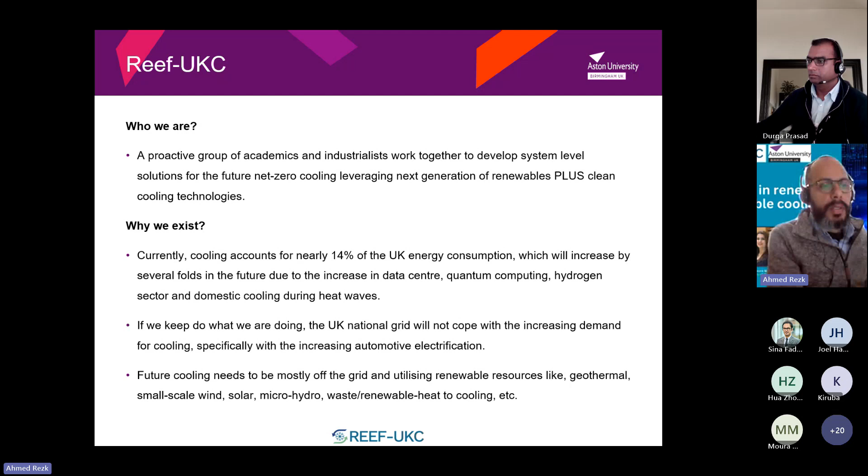So our approach is to get cooling off the grid, to make it more renewable powered cooling. That's why we need to develop new systems, and we need to power clean cooling technologies using renewable energy available in the UK.

What we do in the network: we do networking activities like webinars, in-person workshops, where you attend in person and participate in Reef-UKC. Our aim is to enable today's early career researchers to become the future leaders in this topic. So we don't provide solutions only now, but we need early career researchers to take the lead in the future to enhance this further.

We provide you with some training masterclasses specialized in clean cooling technology and renewable energy technology as well. All you need is to participate. There is no additional cost. We pay all the costs for transportation and all these sorts of things, so your participation is free of charge. We cover all these charges. We are funded by EPSRC to run these activities. So all we need from you is to engage in these activities, whether online or in person.

We promote multidisciplinary research and pave the way to more transdisciplinary research in the UK, and we act on 5 fronts. The first front is technology development. Because most of us are engineers, we want to develop new renewable powered cooling technologies, so we look at clean cooling technologies and how to integrate them with renewable resources. We consider the environmental impact of what we develop today for the future. We consider sustainable businesses and business models, and we try to fill any gaps with current policy to accept new solutions and options, and how to make the unusual usual for the future. We don't work in silos; we try to engage with other ongoing activities funded by EPSRC and other funders to fill the gaps. So we don't want to repeat other people's work—we complement what other people do.

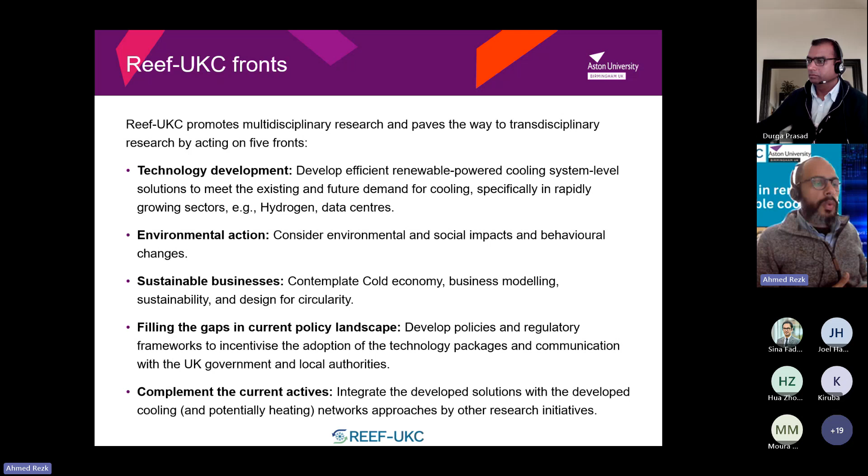We promote stakeholder engagement. We promote EDI in research - equality, diversity, and inclusion. We aim to generate impact.

That's why we try to engage more with industry. We need to take these new solutions to the industry, and we try to promote industry investment in research and development. We provide you with seed funding to enable specifically early career researchers to do the preliminary investigation for bigger projects.

We aim eventually to become a bigger SuperGen hub focused on renewable power cooling systems. So we started firstly with the core members group of 10 universities and some industries from cooling background, heat exchangers, and renewable energy.

We have partners also from City Council - Birmingham City Council and Belfast City Council - and we try to reach out to more local authorities. So this is where we started.

Now we have an increasing number of academic participation in the network, from industry and from international stakeholders and partners from other universities and other companies. And this is only after 3 quarters because we started in July 2024. As we go along, we expect this network to grow further and pave the way to the SuperGen hub in the future.

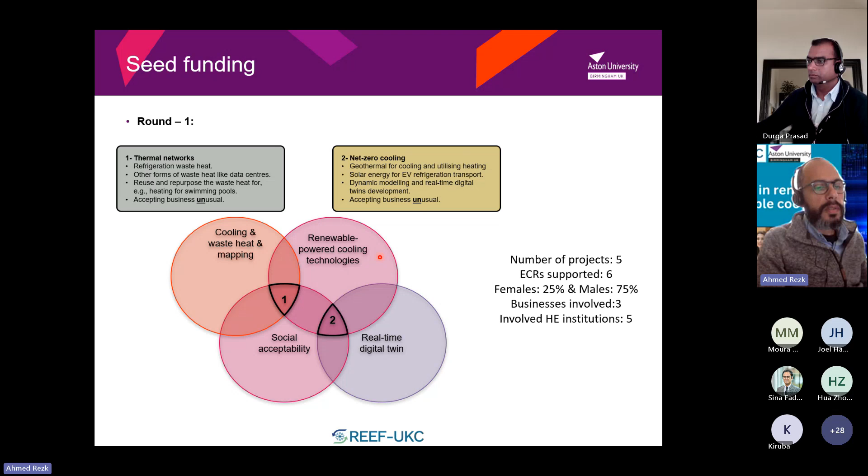So anyone attending today, or anyone you know, you can tell them they can apply for this next round of funding. To be successful for the next round, you need to propose a project based on the theme of our network, which is renewable power cooling technology.

Your project should be multidisciplinary. You should show us that you are planning for bigger funding, because we seed fund your idea - we don't fully fund it. So we help you get started with funding, specifically if you are an early career researcher.

You need to show us that you work very closely with early career researchers. We also promote early career researchers leading the project if possible. And we promote partnership with industry - any partnership, whether cash contribution or in-kind contribution, is very welcomed.

The most important thing is that your project engages with industry. They don't need to fund or put cash into your project, because sometimes we find a very smart SME - they need to grow, but they need partnership with a university to get further funding. So we encourage these activities.

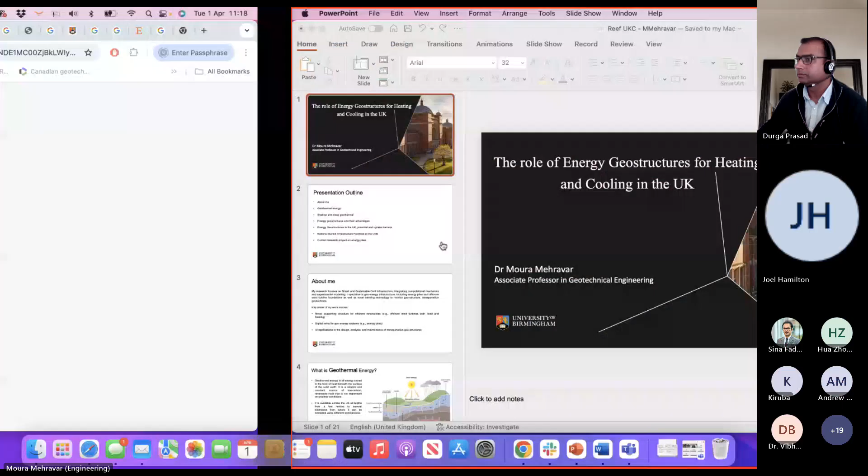Okay, thank you, thanks Durga. Hello everyone, good morning, and thanks for inviting me to participate in this webinar. Durga, I don't know if I can share my screen now. Yes, please try and I'll confirm. All right then, okay. Can you see my screen? Something happening. Yes, it's there now. Thank you, that's good then. Can you hear me clearly? Yes Moura, it's fine.

Okay then, so as Durga mentioned, my presentation is about the role of energy geostructures for heating and cooling in the UK. I'm an associate professor in geotechnical engineering at the University of Birmingham. I was introduced earlier, but just mentioning again.

My presentation outline: firstly it will be about myself briefly, my research expertise, and then I will talk about geothermal energy in general, give you a brief introduction of what it is about, in case your background is not very relevant to the geothermal or geoenergy sector. I will move on further and talk about the difference between shallow and deep geothermal. Then we will go through energy geostructures and also their advantages as a renewable energy will be discussed. I will talk about energy geostructures in the UK, their potential for the UK for both heating and cooling, and the barriers for their uptake will be discussed.

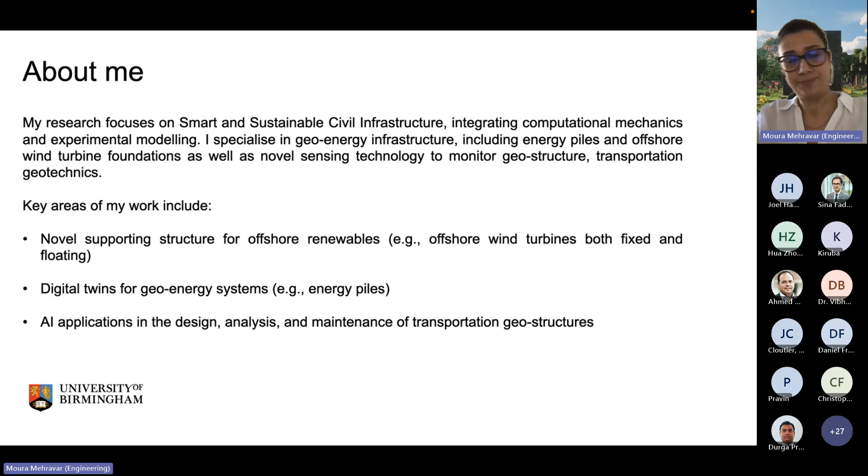So key areas were already touched, but emphasizing on digital twins for geoenergy systems, including energy piles, which is the current project that I'm leading, and AI application in the design, analysis, and maintenance of transportation geostructures, and in general for any types of geostructures. So those are my main research areas and expertise.

So let's, just minimizing. Can you see the figure clearly? Because I can see the slide, team details are shown on the right-hand side of my screen. I don't know if you have this on your screen as well. Yes, I can see it clearly. That's good then. Yeah, it's clear, good then.

Okay, what is geothermal energy? Geothermal energy is all energy stored in the form of heat below the ground in the ground subsurface. It is a very reliable source of energy and considered a low carbon, renewable energy, which doesn't depend on weather conditions, even in the UK.

It is available across the UK at different depths, from a few meters to several kilometers. So based on the depths, it can be extracted and stored using different technologies.

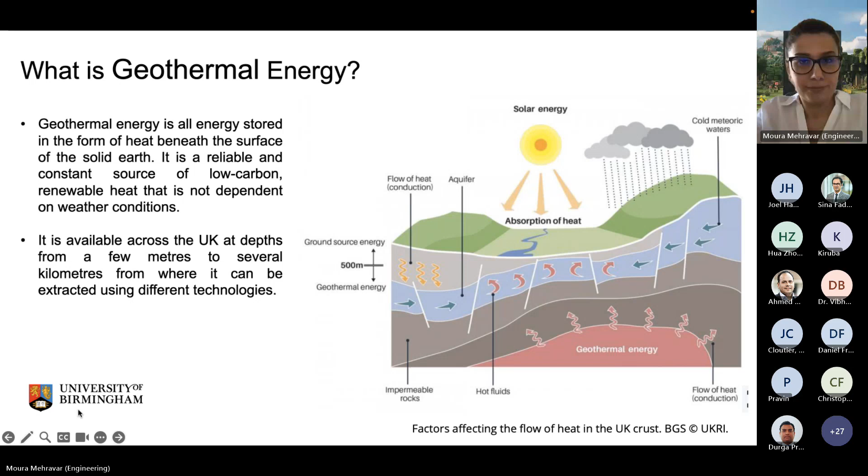There is a difference between shallow and deep geothermal. I'm going to very briefly touch on it, and my focus today will be basically on shallow geothermal - I'm not going to talk about deep geothermal.

Shallow geothermal energy is the low-grade heat, normally between 10 to 25 degrees centigrade, which is stored in the shallow subsurface. Normally we consider up to 500 meters below the ground as shallow geothermal. It requires the use of ground source heat pumps and can be used almost everywhere in the UK for both heating and cooling of buildings.

Deep geothermal energy is the heat stored at depths larger than 500 meters, and temperature within the ground increases with depth in line with the local geothermal gradient, which on average we consider 25 degrees centigrade per kilometer that we go down in the UK. So that's the difference between shallow and deep geothermal.

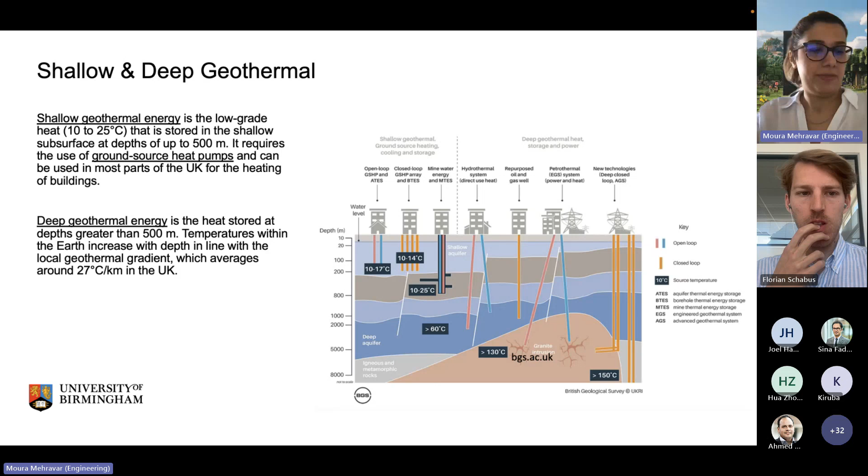Next, I'm going to move on and further talk about the main purpose of today's presentation, which is energy geostructures. Firstly, energy geostructures are part of ground source heat pumps, so during the presentation I may talk about ground source heat pumps and geostructures both together. It's important to know that this is a part of ground source heat pumps.

There is a slight difference, but it is categorized as a part of it. Energy geostructures are a type of shallow energy technology where building foundations, such as piles or other buried infrastructure like underground stations, metro stations, tunnels, sewer pipes, and underground walls, as you can see in the pictures, are used to access heat from the ground.

It can be used for both heating and cooling purposes, as well as acting as a structural element of a building. So they are novel dual-use engineering substructures, which means they can be used for heat transfer and storage, as well as the original purpose of their design, which is structural function.

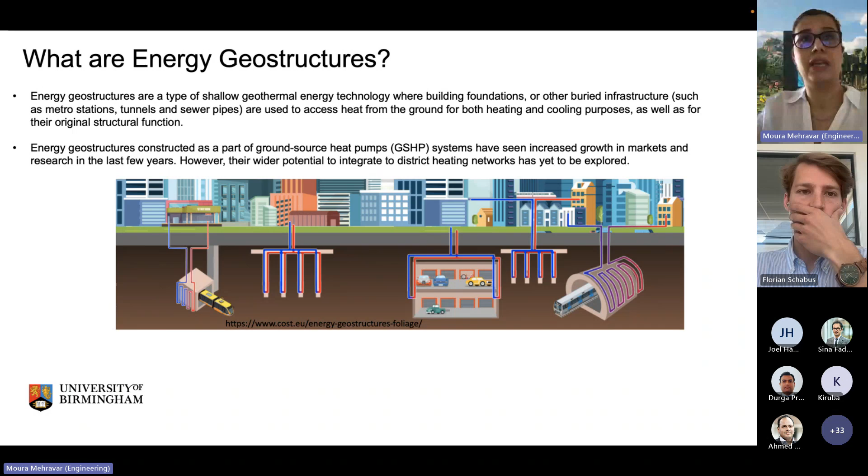So there are plenty of advantages of energy geostructures, or in general ground source heat pumps. The first one is low impact and space efficient. This technology uses minimal land area and creates low visual and noise disruption, which makes it a very ideal option for urban settings.

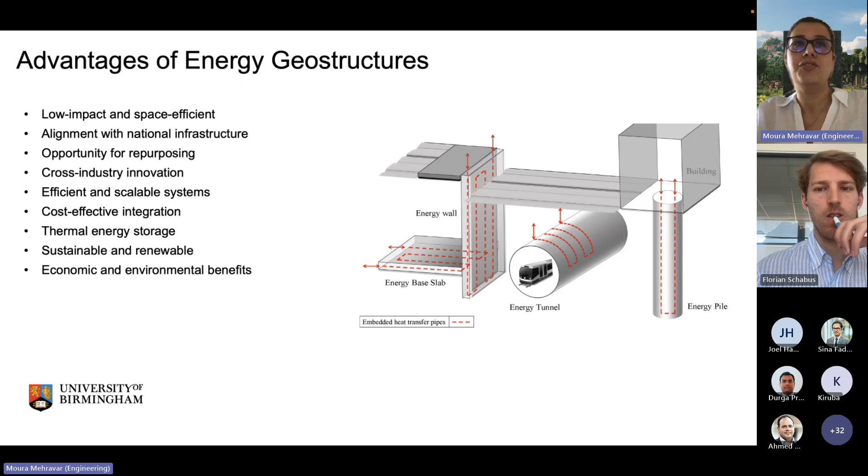But why are we not using this in the UK a lot? That will be addressed shortly. They can deliver low or zero carbon heating and cooling to buildings in one of the following methods: firstly, by direct connection to a ground source heat pump in an overlying or adjacent building, or by connecting to a heating and cooling network, either through a central heat pump which feeds a high temperature network, or through an ambient loop network, which requires individual buildings to operate their own smaller heat pump.

A recent study by UKCRIC, led by the University of Leeds, highlighted the contribution which buried infrastructure and underground structures, converted to energy geostructures, can make in decarbonizing heating and cooling in the UK, which again shows the huge potential we have in the UK. Another research, again led by Leeds and EPSRC, shows that these energy geostructures can contribute in excess of more than 50 terawatt hours per year of thermal energy, which can help decarbonize heating and cooling in the UK.

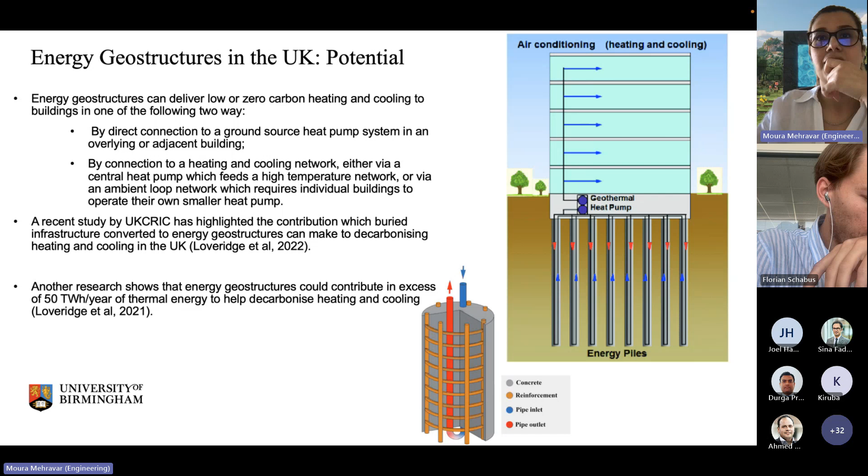So in this picture, I put a more detailed picture of energy piles, geoenergy piles. You can see for this building, the piles which are designed to support the building as a structure have been used as energy geostructures. By just embedding pipes, you can see the detailed piles - it has U-shaped pipes, one inlet, one outlet, just getting energy from the ground and using it for air conditioning, heating and cooling of the buildings. That's the procedure we use in civil engineering, basically designed to get energy from the ground. That's another example of a geostructure.

So, uptake barriers. We talk about lots of advantages, and they were just some of them. There have been several UK government support programs to businesses as well as to individuals to support uptaking these technologies. However, uptaking these technologies is very slow compared with much of European countries, and you will be surprised if I say the uptake of this technology in the UK accounts for less than 1% of renewable energies in the UK, based on data I collected in September 2023, which I can say is nothing, 1%, despite the huge potential that we have.

Recently, Crossrail, the Elizabeth line underground station and line, embedded energy pipes in their tunnels. So their tunnels are empowered with pipes to produce energy, and their tunnels are considered as geostructures, energy geostructures.

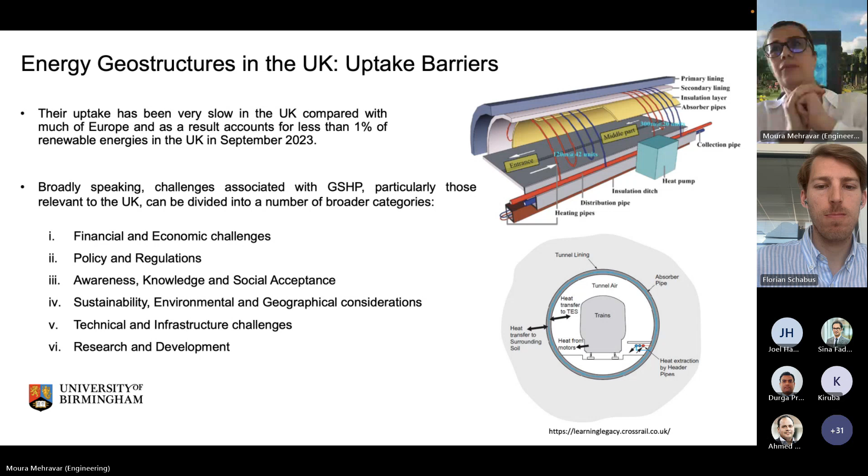So, financial and economic challenges. Firstly, high initial installation cost, which is mainly relevant to ground source heat pumps, meaning they require significant upfront investment, combined with limited, accessible, and attractive financing options for both homeowners and businesses developing the homes, which affects the uptake of these systems.

Another thing is market uncertainty challenges for the adoption of ground source heat pumps in general. The energy efficiency of ground source heat pumps is affected by electricity prices, but fluctuations in oil and gas markets make predicting their price very difficult, reducing the market certainty needed for wider adoption and confidence in taking this technology into the market and making it widely acceptable by the public as well as asset owners, businesses, etc.

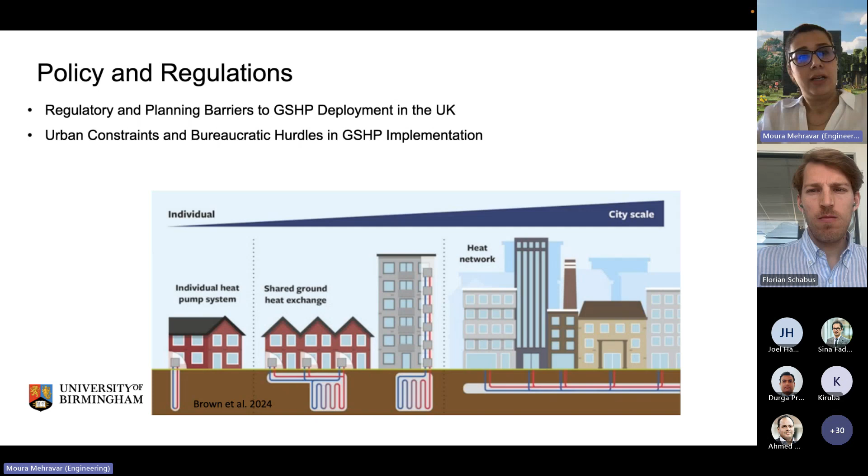Awareness and social acceptance is another problem. You will be surprised if I say research published in 2020 showed that more than 60% of the public haven't heard about ground source heat pumps, including energy geostructures, which is very surprising.

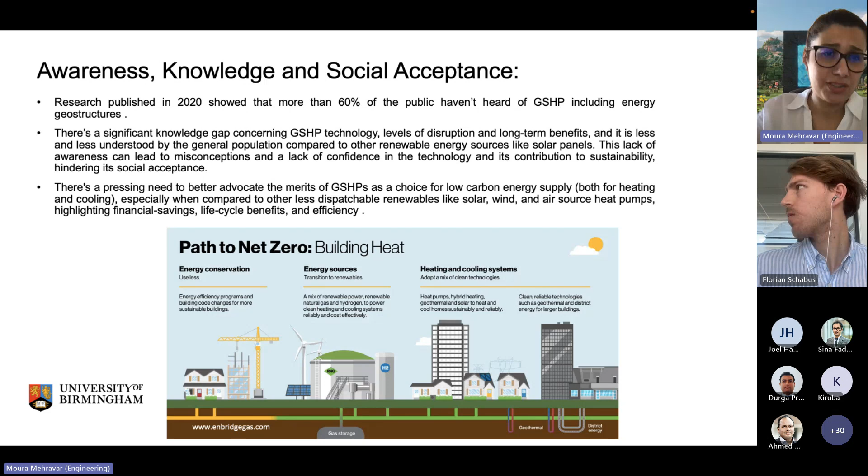There is a significant knowledge gap for this technology, and people are not aware of the level of disruption and long-term benefits of this technology. It is less understood by the general population compared to other renewable energy sources, such as solar panels for commercial and residential buildings. The lack of awareness has led to misconceptions and lack of confidence in this technology and its contribution to sustainability, which has affected its social acceptance.

So there is a pressing need to better support the merits of this technology as a choice for low carbon energy supply for both heating and cooling. When we compare it to other less dispatchable renewable energy sources like solar, wind, and air source heat pumps, it has huge potential for financial savings and life cycle benefits. If we investigate further on the technical aspects, we can also increase their efficiency in producing renewable energy.

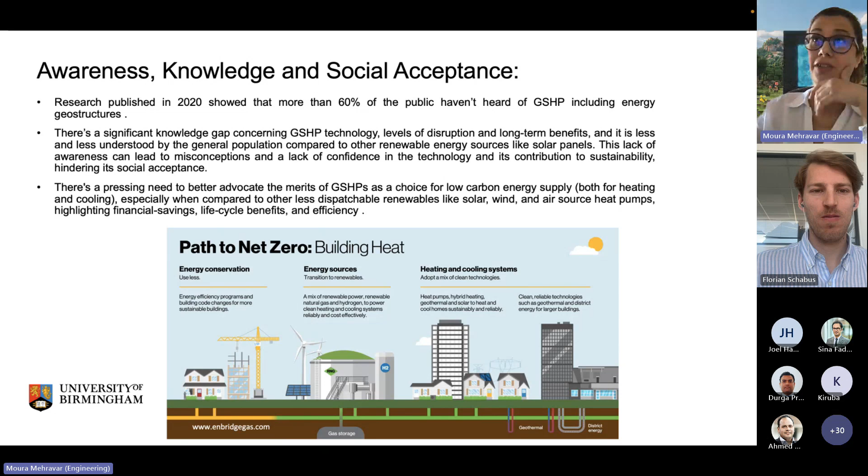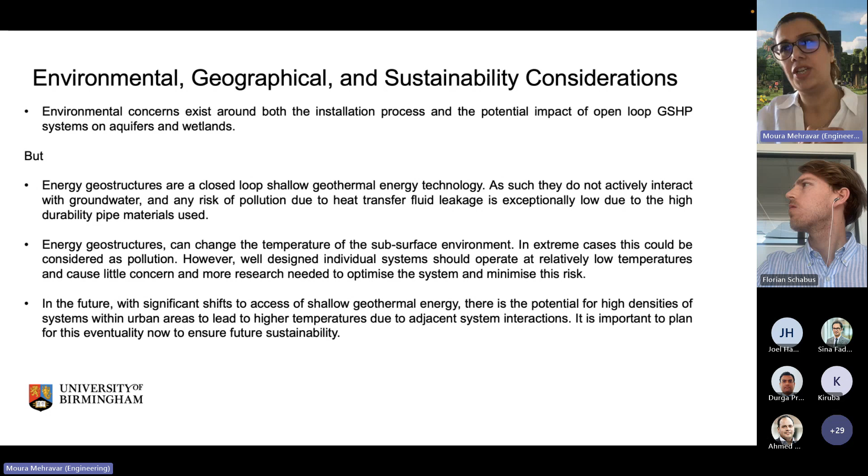So I don't know the time, Durga. Do I have enough time? Am I behind? Maybe you'd like to wrap up quickly. All right then, thank you.

So my interest is covering technical and infrastructure challenges. Installing ground source heat pumps in both new and existing buildings is complex, as I mentioned earlier, and always requires modification to structure and careful navigation of subsurface infrastructure—basically investigating the ground condition.

Underground components face durability challenges. The durability, integrity, and resilience of underground components, such as concrete for piles or tunnels, pose uncertainties, as repairing their failure is problematic and very costly. A solution involves novel approaches to backfilling grouts, as subsurface components are challenging in problematic conditions—for example, in ground conditions where the soil is problematic and sensitive to shrinking, swelling, creeping, or displaced grounds. The impact of groundwater must also be considered, along with complex soil chemistry.

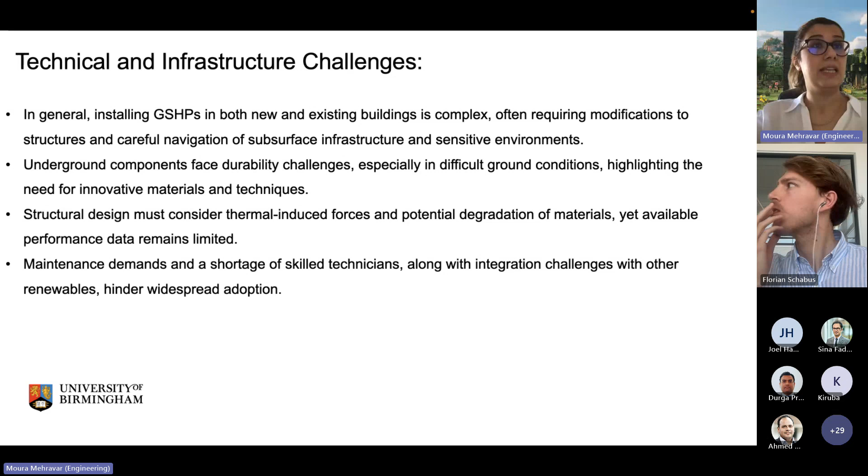So, research and development—what we can do.

To bridge knowledge gaps and enhance efficiency, we require a comprehensive research approach, creating precise site investigations and optimizing the design of the system for local conditions.

Ground conditions differ from the place I am presenting from to where you are listening and watching me, so we have to be careful to have detailed ground conditions.

Innovations in material science can lead to eco-friendly, durable heat exchangers, both with concrete, pipes, and backfill materials, and can cut installation costs and increase equipment lifespan, or the service life, of energy geostructures.

With advancements in monitoring systems, such as the progress over 20-30 years in fiber optic sensing technology to monitor geostructures and structures, and embracing low-cost hardware and software computing systems and the use of digital twins, we can maximize system performance and facilitate the integration of this technology as one of the renewable sources of energy in the UK.

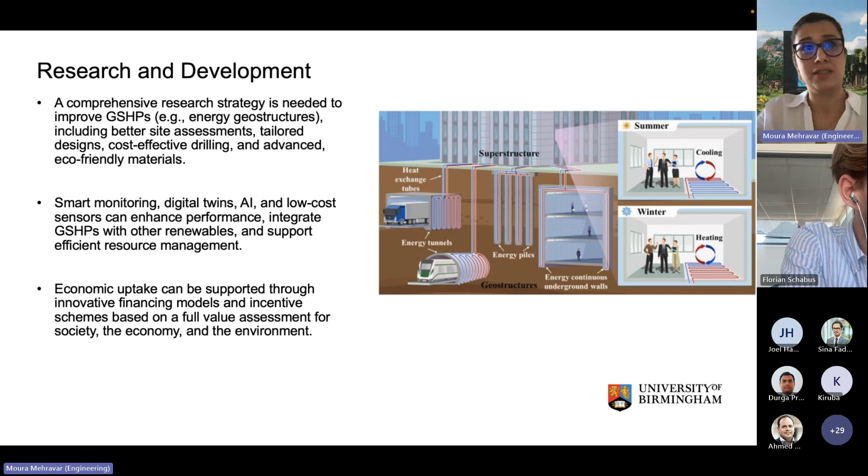So, now I'll talk about my current research on energy geostructures.

Before explaining the project, I'd like to talk about the National Buried Infrastructure Facilities we have at the University of Birmingham, NBIF. We are part of the government investment for the UK Collaboratorium for Research on Infrastructure and Cities, under EPSRC. University of Birmingham is part of EPSRC and this facility was constructed as part of that.

We received 22 million pounds and another 6 million from the university, and based on that we built the National Buried Infrastructure Facilities.

It is one of its kind, with facilities spanning research, innovation, education, CPDs, and training in buried infrastructure, ground and soil-structure interaction, and anything embedded into the ground, in a large-scale controlled environment.

The research we focus on is buried infrastructure and ground interactions, which is highly important for energy geostructures—tunnels, piles, walls, anything embedded into the ground—so we can model it in a controlled, large-scale environment, which doesn't exist anywhere else around the globe.

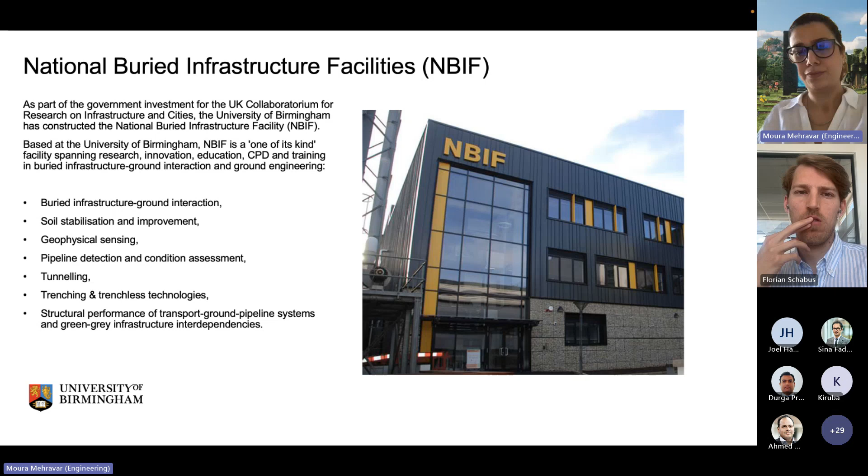We also look at soil stabilization improvement, geophysical sensing technology, etc. Using these facilities supports us to do lots of research in this field.

We have a pit, shown on the right-hand side on top, which is 25 meters by 10 meters and, importantly, 5 meters deep, allowing us to model lots of underground infrastructure.

In the middle, we have a centrifuge. If we don't want to use the large-scale facility, we can replicate and model reality at a very small scale using the centrifuge to replicate real ground conditions.

And we have a movable floor with lots of actuators, around 50 actuators, which allows us to simulate ground movement.

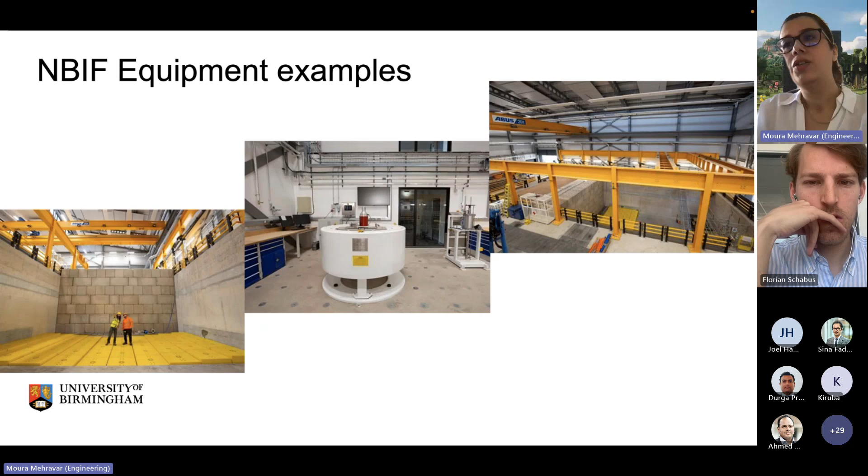Using these facilities, I have a project improving heating and cooling efficiency and system resilience of shallow energy piles. The purpose is developing a digital twin of the system.

This is based firstly on data from numerical simulations—a comprehensive numerical simulation considering all contributing parameters and thermo-hydro-mechanical interactions of the system—and then integrating physical experiments with computational modeling.

We want to simulate heat transfer, fluid flow, and soil-pile interactions, and then develop a digital twin of the system, feeding it with real-time data so we can optimize the heating and cooling performance of energy pile systems.

We have done some of these projects, so hopefully in the next few months I can share further details with you.

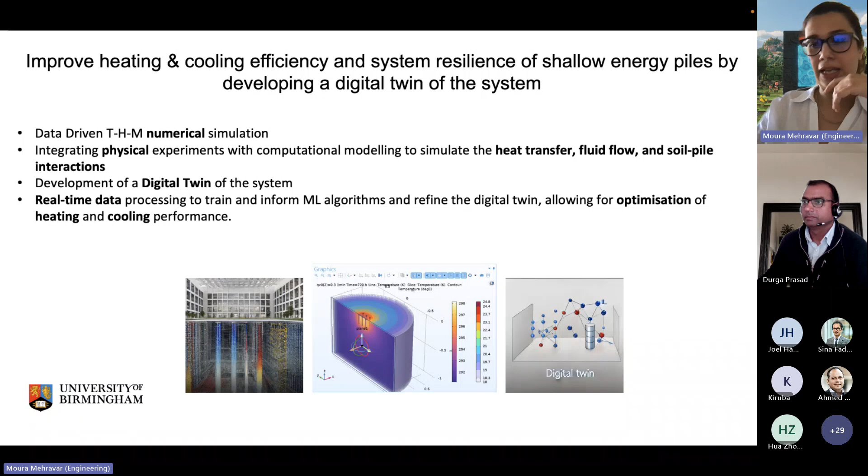Moura, sorry to interrupt, we're short on time—if you'd like to quickly wrap that up. That's all, apologies. Brilliant, thank you, that's the last slide.

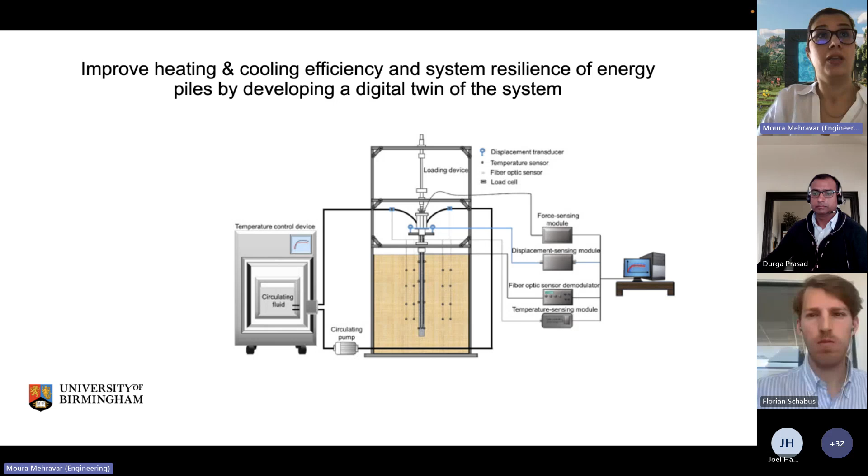Hopefully in the near future I can share our final data on what we have done and what we have concluded to improve the efficiency of the system. Thank you so much.

If you have any questions, I'm happy to answer. And if you have any technical questions about the performance of geostructures with ground interaction relevant to geotechnical engineering, drop me an email.

Over to you, Florian. I am not able to see if you're presenting. Thank you. Can you not see my screen yet? Wait, I can't see your screen yet. Okay, let me try again. Does this work now? Not yet. I've had some challenges with Teams all day, but hopefully. Yeah, technology sometimes, it's really crashing. Let me try again. Can you see it now? Nope. Wait, give me a second. It shows me that I'm sharing my screen, but somehow it doesn't seem to work. Does it work now? Let's wait, I don't know yet. I can't see anything appearing on the screen yet. Wait, sorry for that. Does this work? Yes, there we go, okay great.

Sorry for that. Very good to meet you all, and thanks for inviting me, Durga. I will try to provide a bit of an industry perspective on some of the challenges and opportunities of introducing novel cooling and heating technologies.

As a bit of background, we're a spin-out from the University of Cambridge, have done a lot of academic work into different types of solid materials that can be used to replace conventional refrigerant gases. Since about a year's time or so, we've built up a team on the startup side to commercialize that innovation. So we'll use the next couple of minutes to tell you a bit about the journey, what we're doing, and what the challenges are for startups and technology developers in that field.

Maybe a bit of background - I'll skim over this quickly. Cooling and heating is obviously a big sustainability problem, and with rising temperatures but also electrification it's going to get even worse. The global demand for cooling and heating is projected to grow by a factor of 3 to 4, both because of increased demand for cooling for comfort reasons, but also things like data centers, which means that in a lot of countries cooling will account for more than 40% of peak load energy demand.

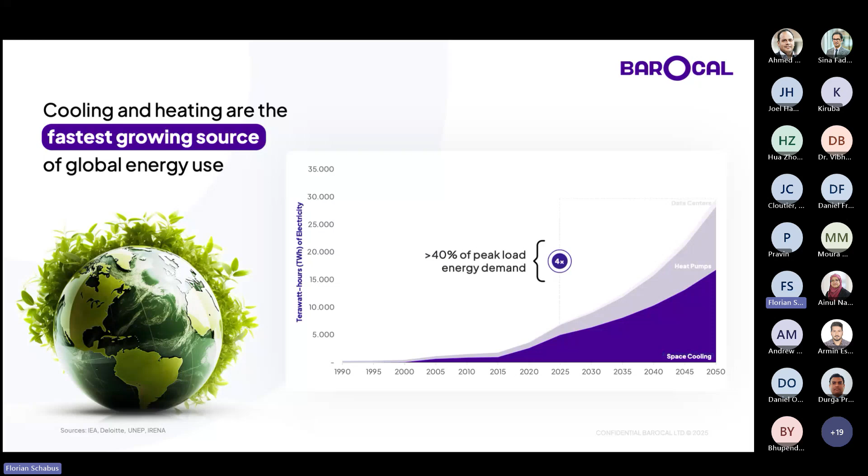Certainly also in the UK with rising temperatures, the demand for cooling is growing a lot, and at the same time, for sustainability reasons, we're trying to promote the use of heat pumps. The problem that we're trying to tackle at the company is that conventional cooling technologies, most of them at least, are based on vapor compression. And the problem with conventional vapor compression cycles is that on the one hand, the energy efficiency is still very low compared to what's theoretically possible.

So we run very inefficient cycles. And on the other hand, even though there's a lot of regulation, we're still using a lot of refrigerant gases with very high global warming potential. Trying to shift away from these high GWP gases means adopting alternatives that are more difficult to handle because they're flammable or explosive, and that sort of limits adoption of natural refrigerants.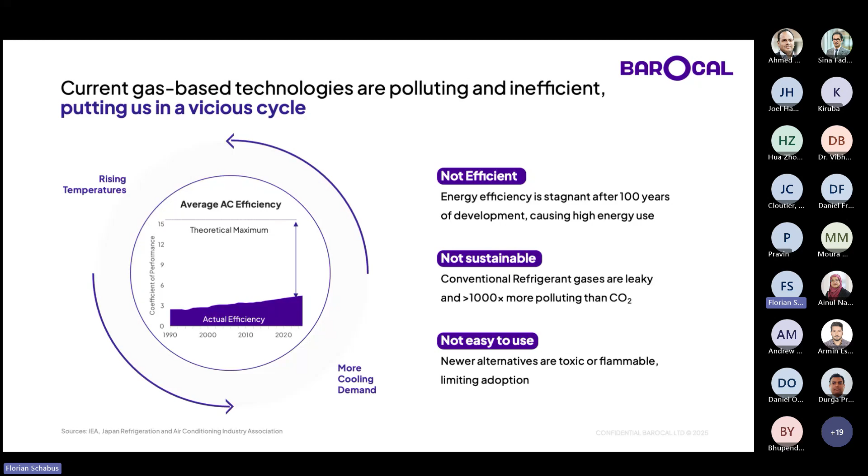So the background to what we're doing at the company is really a lot of academic work into different types of solid materials that could be used as a replacement for these conventional refrigerant gases. Traditionally, there have been 4 major types of solid materials, so-called caloric materials, that basically change their temperature as a function of a change in field - whether that's a magnetic field, or in our case, applied pressure.

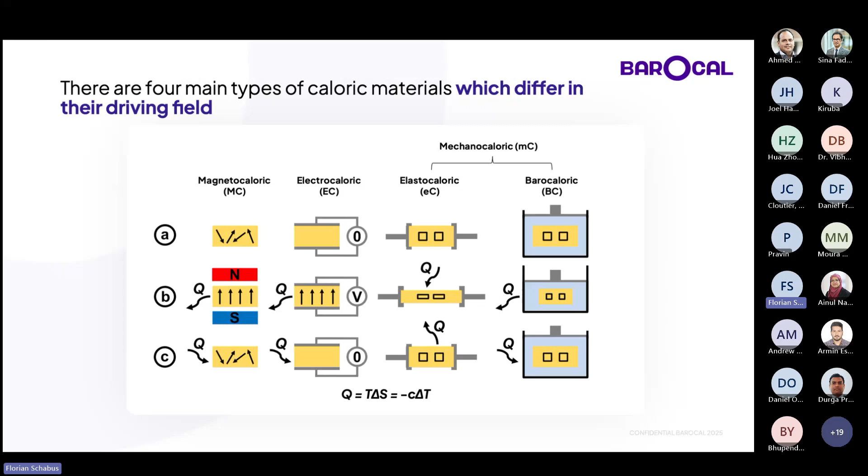So there's different alternatives, and we've done a lot of research at the university into all of these different fields. Certainly magnetocalorics and elastocalorics have been around for a very long time, but they had never really performed well for commercial applications. Scientifically they've been very interesting, and there's been a lot of academic publications, but they always struggled to get real traction commercially because the performance wasn't good enough - the materials didn't have the required temperature spans, weren't efficient enough, and were also based on materials that were a little too expensive.

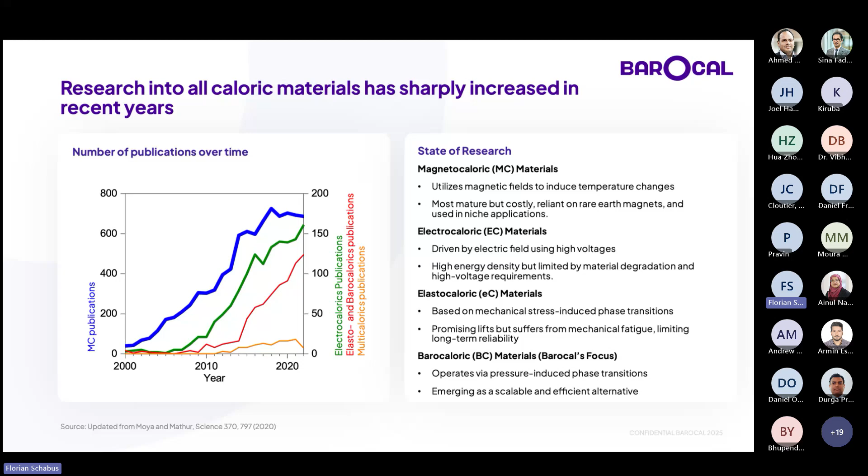So the starting point for our company has really been: okay, can we find a solid material that can compete with a conventional gas?

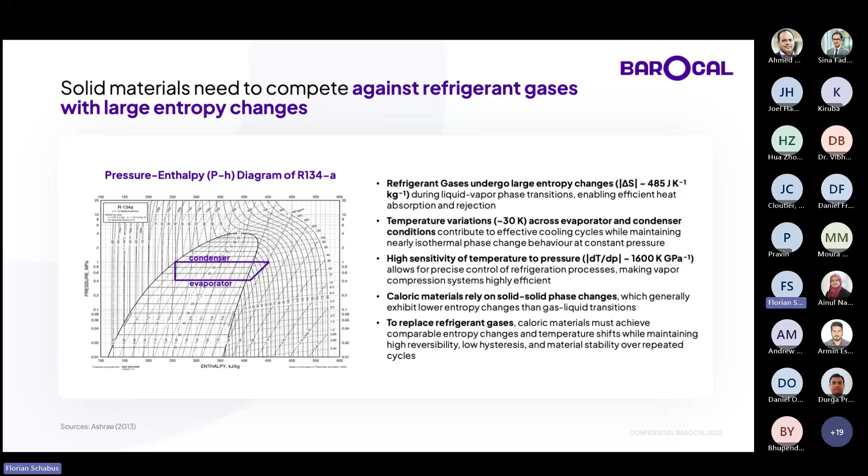Vapor compression is a fantastic technology, and so it's going to be very difficult to find something which can match the performance of a typical gas. In the end, though, we for the first time had discovered a solid material which delivers the same thermal performance as a conventional refrigerant gas, and that was by two orders of magnitude bigger than any other solid before. So based on that scientific discovery here at the university, we started spinning off the company to commercialize these novel materials.

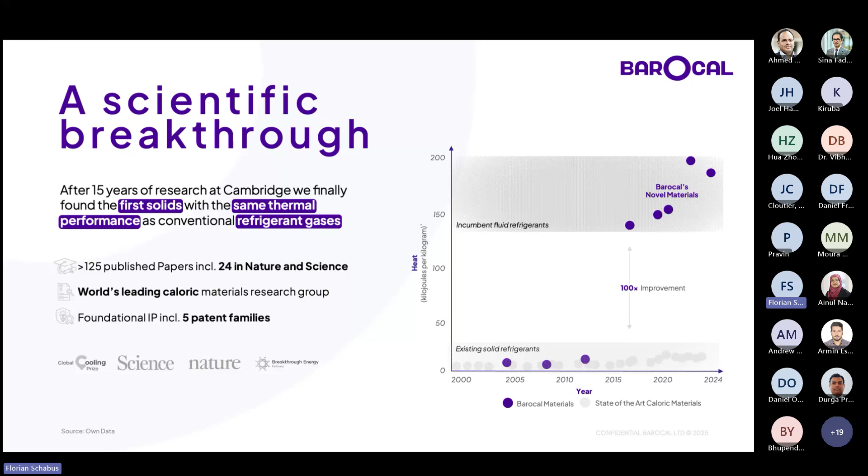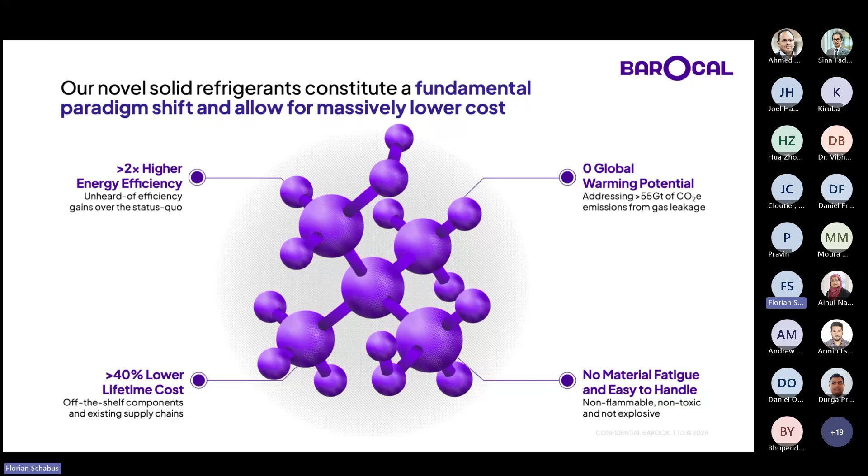What are the advantages and why is that interesting? On the one hand, we can have a refrigerant which has no global warming potential, so there's no leakage issues and no fugitive emissions from the gas. But on the other hand, we can also build systems which are a lot more energy efficient than a typical vapor compression system, because we can overcome some of the limiting factors when it comes to efficiency in a typical vapor compression cycle. So based on these solid materials, we can build systems which are a lot more sustainable and a lot cheaper to run from an OpEx perspective.

The challenge for us has been to translate that material science innovation and academic work into actual systems and real products that can deliver that performance, because our ambition has always been to build something which can have large-scale impact. It was very important for us to not stop at the academic work, but really show that this can be applied in the real world.

So we've built a number of prototypes. The one you can see here on the big picture is our old prototype, what we call the Generation 2 prototype, which has been the first ever solid system that delivers the same energy efficiency or coefficient of performance as a typical vapor compression system, which has been a nice breakthrough for us and really the starting point of the systems engineering we've been doing.

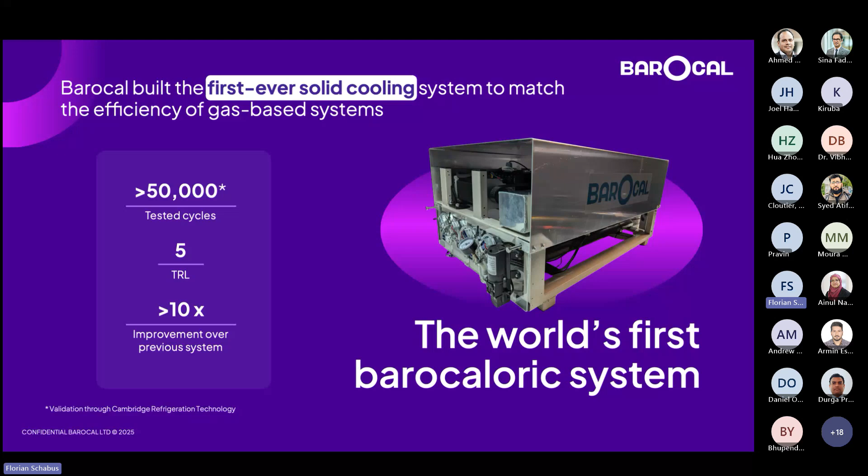And really what we're working on now is building a very universal compressor, which basically works on our materials and can replace refrigerant gases across a large number of different applications.

The challenges for us have been, how do you design the heat transfer for such a system where you basically have a solid, stationary in the system, that's being pressurized or compressed and changes its temperature in a very cyclical way? So you can't pump it around like in a typical system. We need a secondary heat transfer fluid to basically extract that heat out of the system efficiently.

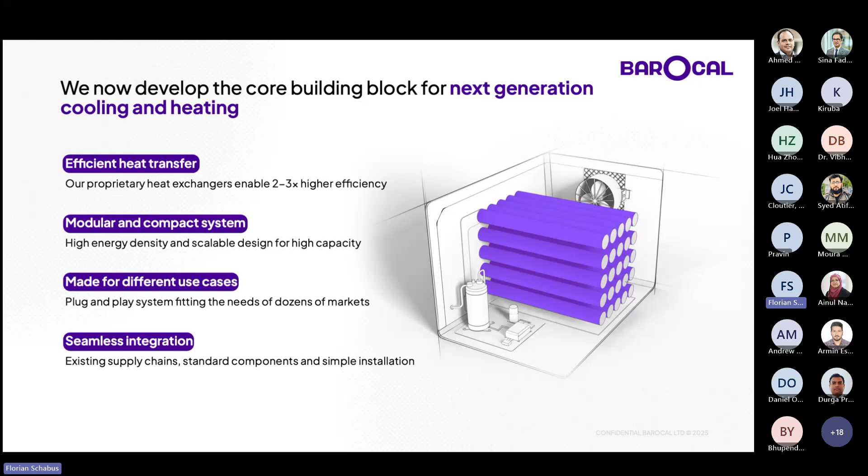We also had to work on the design to make it very modular and compact, because compressors had 100 years of development, so they're very small and can fit into lots of different footprints. And also making sure that in the end, the system we built is very easily integratable with standard systems on the market - basing it on existing supply chains, standard components, and making sure it interfaces very easily with whatever application we're targeting.

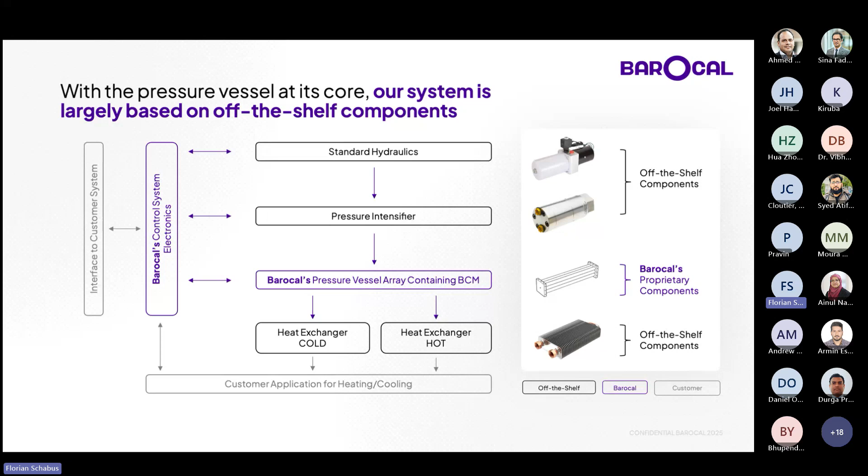That's what we've been working on. We built the system very much on off-the-shelf components. There are certain hydraulics components in our system that pressurize the material. The material is sort of our secret sauce, and then we have heat exchangers to reject the heat. So in the end, a very simple system.

Where we are now is that this year we're finalizing the work on the third generation prototype, which is the first prototype that we're actually going to pilot in the field. We're working together with existing manufacturers and producers of systems, because as a startup, it's very hard to produce something at scale, but that's necessary to bring down the cost, because of course we're producing more air conditioners than cars every year.

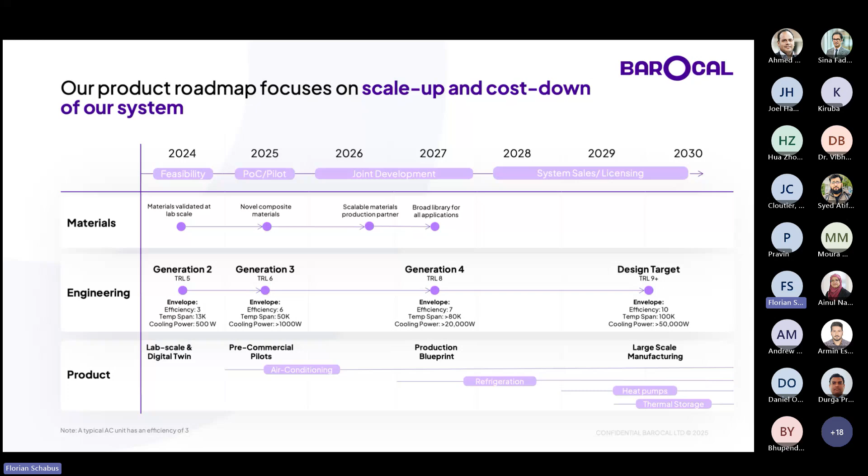Sorry for that. So, working a lot with partners to cost down the system and making sure we can not only deliver high performance, but also have a system which can fundamentally be manufactured at low cost at scale. So this has been always the objective.

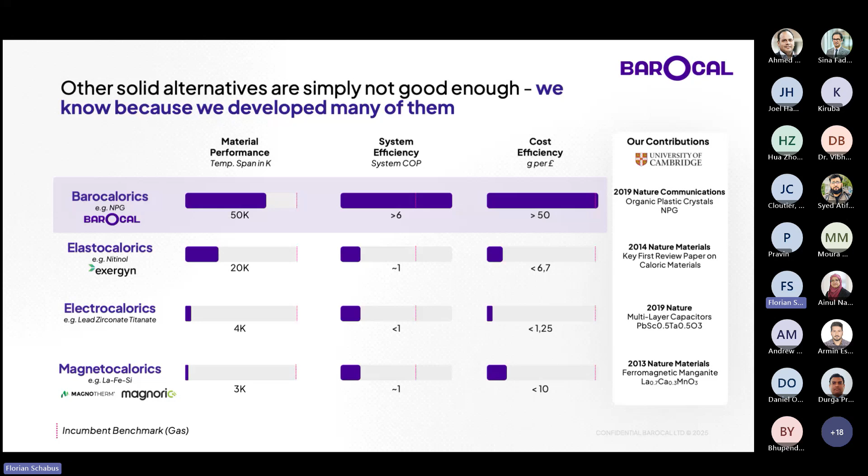I think now with systems that are far outperforming any other systems based on solid materials, it's been quite nice that we were able to translate this academic breakthrough into actual prototypes and systems, and show that this is finally an innovation that can make it into real market applications, because we have that long academic legacy of about 15 years of research at the university.

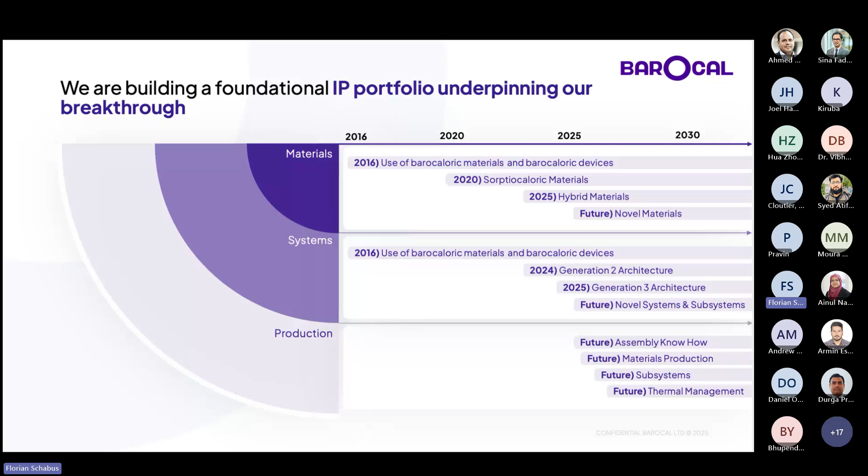There's a number of patents underlying what we're doing, which for us as a startup is very important, because we want to make sure that we have enough defensibility and protection in the market, that we can really commercialize this innovation properly. In the end, where we see this going is really as a very universal replacement for typical compressor units across a lot of different applications, really delivering a 0 GWP solution with a lot higher energy efficiency, whether that's in cooling, heating, or refrigeration.

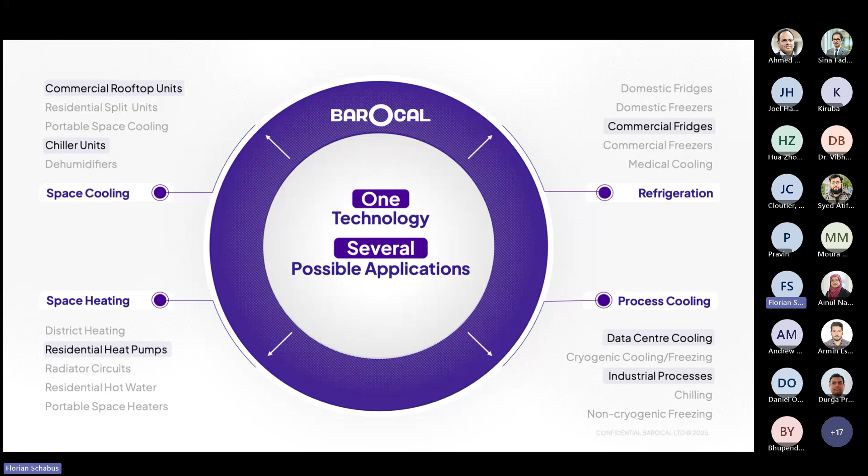So a lot of different opportunities for us, and something that from our perspective can have a real impact from a CO2 perspective. Because obviously we're reducing the effect of the refrigerant itself, but also through the higher energy efficiency can really reduce the indirect emissions and the energy use of the systems, addressing probably one of the biggest impact opportunities there are globally. And so this is what motivates us.

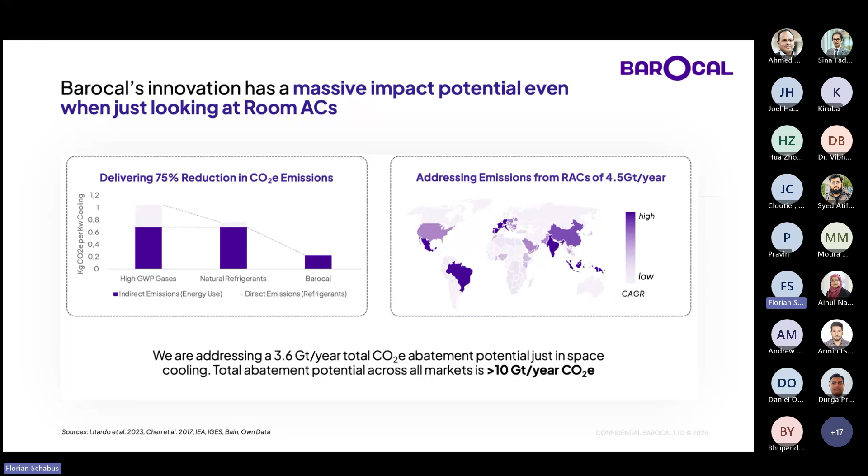We're a small team, 8 people in the company now. Got about 4 million in funding so far, a mix of grant and equity. The university has been very supportive in that, so we still work very closely with them.

Very excited to connect with anyone interested in learning more about solid state cooling and finding out if there's any potential synergies with other projects going on, whether that's in heating, cooling, or certain subsystems, heat exchanger designs, etc. Very, very open for any potential collaborations with other research groups.